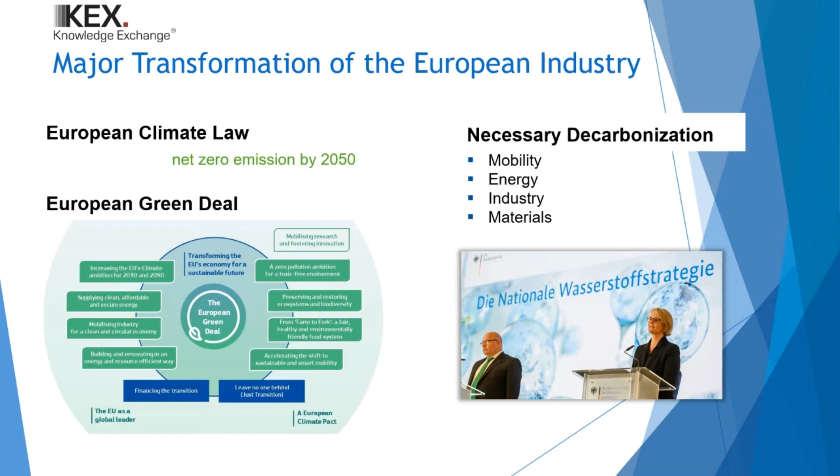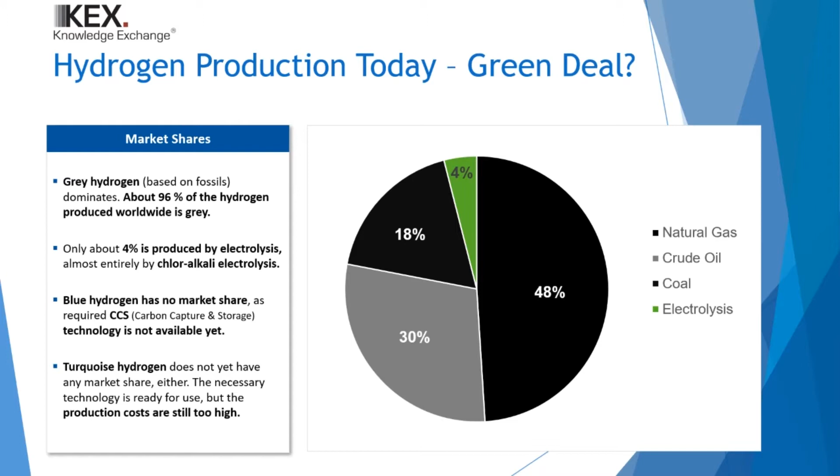And for sure, when we think about the next step for hydrogen, it has to be green. So we have to develop technologies to realize such a green hydrogen production, meaning without CO2. And we need to realize that this green or CO2-free hydrogen production also has to be competitive compared to the prices of gray hydrogen. And this is one of the major goals we have here in Europe. And this will also be one of the major advantages here in Europe compared to other countries like America and China. Because here we have really good technology know-how in Europe, where we can develop good production technologies, good material developments. So it's really important to start these green, CO2-free hydrogen developments now.

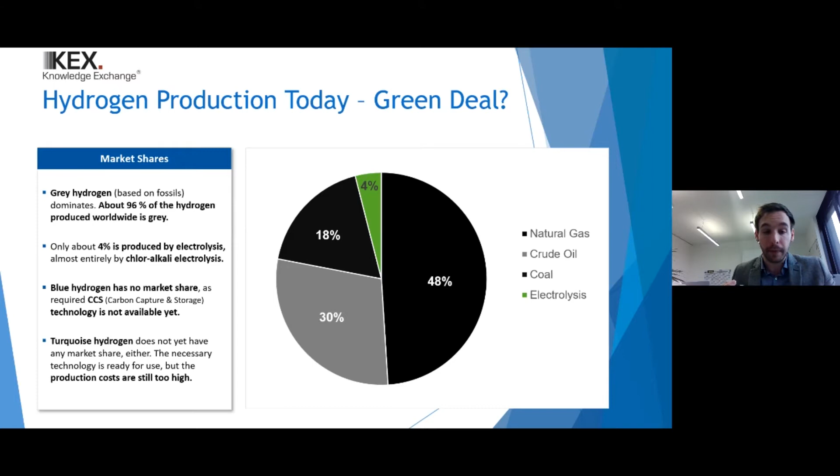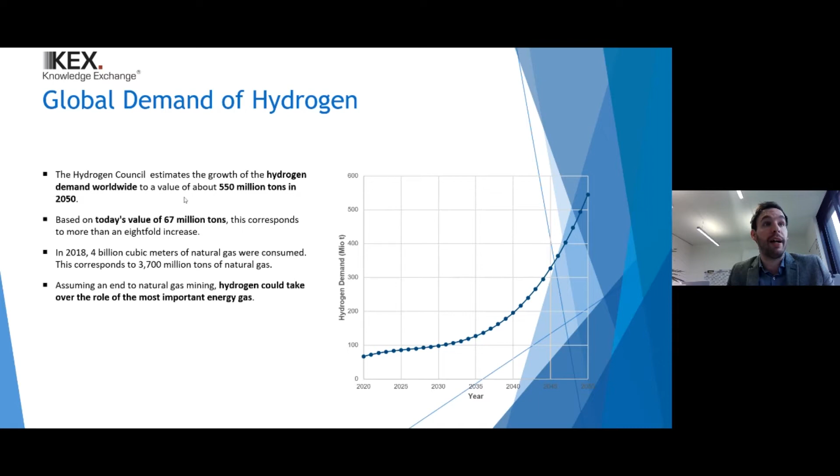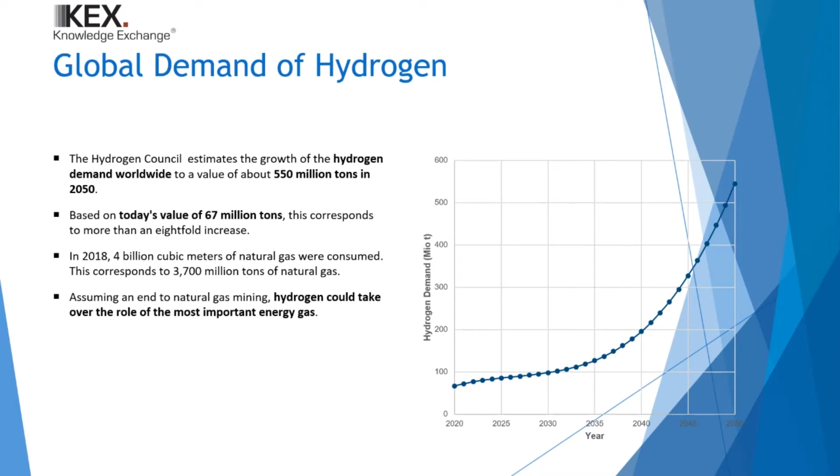And when we also take a look here, you see on the right a picture of the estimation of the Hydrogen Council. This estimates the growth of the hydrogen demand worldwide to approximately 550 million tons of hydrogen in 2050. And when you look at where we stand now, it's more than an eightfold increase. And here you also see that hydrogen is really needed for next product developments in the field of mobility. Mobility is one of the key drivers for hydrogen so far, but to be honest, we can buy such a hydrogen vehicle, but for example, a Toyota Mirai costs approximately 70,000–80,000 euro, so nobody will buy this. And here the goal is really to decrease the production prices. And yeah, this is more or less what we saw in the market of hydrogen.

And 3 years ago, we started our activities here in Aachen in the field of hydrogen. And we started with the question, how can I industrialize a fuel cell? So the utilization of hydrogen. And here we started with companies like Toyota, like Ford, like Daimler, together with automotive tier 1 suppliers, like Siemens, like Bosch, like Rheinmetall, to develop potential technologies to industrialize such a fuel cell. So the big goal is to decrease the prices. That means we develop new designs of fuel cells. We're also going directly into prototyping to really have clear data.

How can I decrease the cost of such a fuel cell product? But now, I would say such automotive OEMs say, okay, we are ready for market entry. But when we are honest now, for the hydrogen economy, let's say it's nice to have such a fuel cell system that is maybe good in price, but everything before this hydrogen utilization, meaning the hydrogen production and hydrogen infrastructure, is definitely also important. Maybe it's also much more important to realize which technologies can be realized and how can I decrease the price.

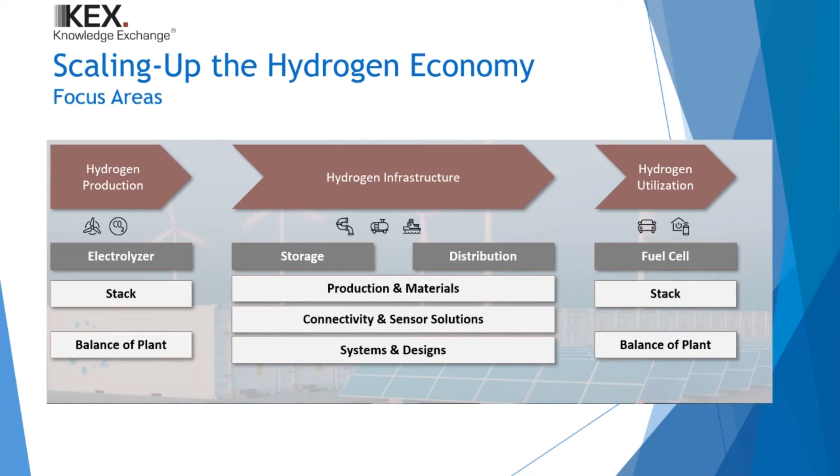And for sure, you can also imagine that will not work with only one company. Here we have to build up a really strong network with strong companies, with strong research institutes, to really say, okay, we build up now a product, a material for hydrogen, and say, okay, this is now the standard for us in the field of hydrogen production or hydrogen infrastructure.

And what does it mean really? So what are typical components in such a fuel cell system, in such an electrolyzer system? Typically, it's divided a little bit into the balance of plant, meaning the overall system, and the stack component, where the hydrogen and the oxygen are reacting with each other. And when we take a look at the balance of plant especially, we see there are a lot of components and a lot of know-how that have to be built up.

So in the balance of plant we talk about hydrogen tanks. We talk about air compressors. We talk about electric motors. We talk about batteries. We talk about hydrogen lines. But what we also talk about is, let's say, these smaller components called sensors, pressure valves, rectifiers. This is also a really important point. How can I build up a lot of sensors, a lot of valves for my hydrogen economy, and what are the standards and norms for these?

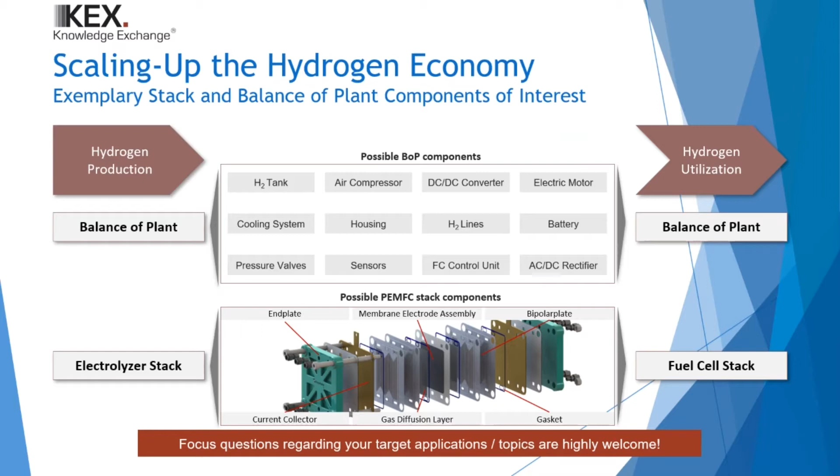And in the field of distribution, we talk about developing new material pipelines. We talk about the big problem of hydrogen embrittlement. You have to think about hydrogen, the smallest molecule. So there are a lot of problems or challenges in the field of materials. We talk about fittings and connections, and we also talk about retrofitting of existing infrastructure. So for sure, it's maybe a goal to use the existing infrastructure for the gas sector, for example, so that I can also use hydrogen in this infrastructure.

But the question here is, how can I do it? Can I do it without a problem? At the moment, they say up to 10% hydrogen can be introduced in the existing infrastructure. But what's happening when my hydrogen economy is scaling up? Then I need much more hydrogen. Is it maybe possible to do retrofitting in my existing infrastructure up to 20, 30, 40, 100% hydrogen? What do I have to do? These are really interesting questions, and these questions are at the moment not solved.

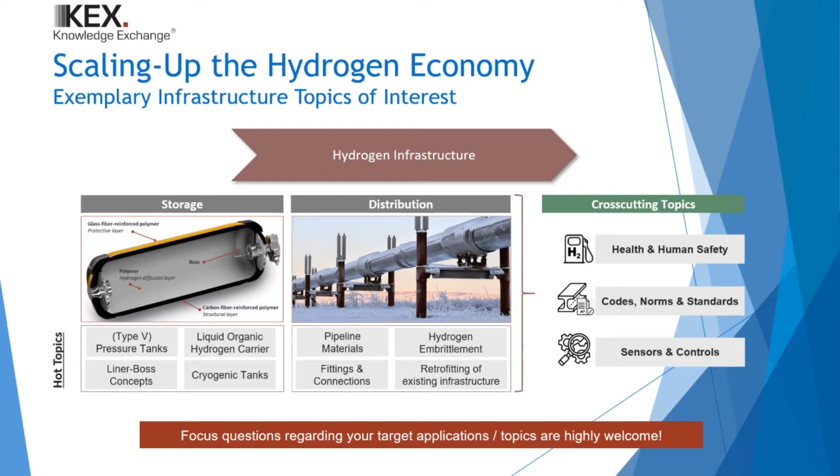And in general, the cross-cutting topics are really, really important. The most important thing, and a lot of people are afraid about this, is health and human safety. A lot of people say hydrogen is really dangerous, I'm not sure if it's working. And for sure, codes, norms, and standards, to establish new standards. And the sector of sensors and controls, what can be done in these fields, are cross-cutting topics as well for hydrogen production and utilization, and also for the hydrogen infrastructure.

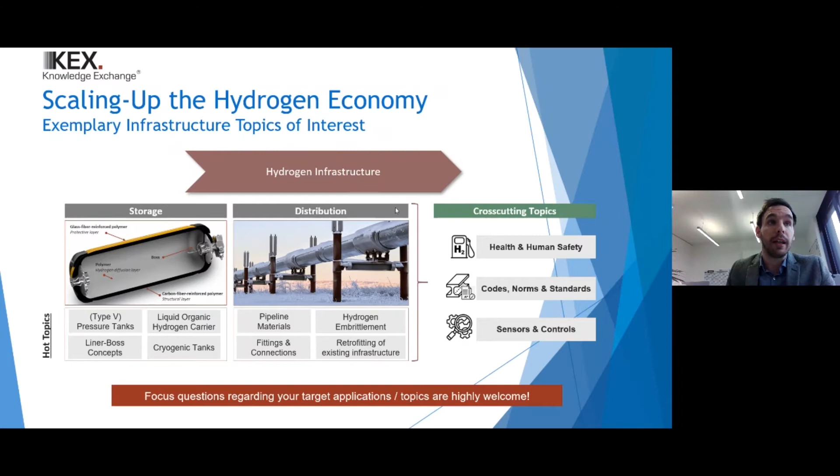I told you that hydrogen vehicles, or hydrogen products in general, are really expensive, and I would like to show you why this is the case. When we talk, for example, about battery vehicles, then you have your power electronic system. So you have a battery, you have a DC-DC converter, you have a DC-AC inverter, a motor.

But now in the field of hydrogen, I also need these power electronic systems, and on top I need a lot more systems. So for example, when I want to process my fuel, my hydrogen, I need a lot of components here. I need my tank, my pressure regulator, I need an injector, I need a hydrogen recirculation system in general, and for sure I need a lot of components, also valves, sensors, and so on.

Then beside this hydrogen processing, I also need air processing. So I need my oxygen. And also for this, I need a lot of things, an expander, for example, a humidifier, for example, and also a compressor. So this is a really expensive part. And on the other side, I also need thermal management systems, which are also important. Heat exchangers I need, which are really expensive. So you see, this overall system is really, really expensive.

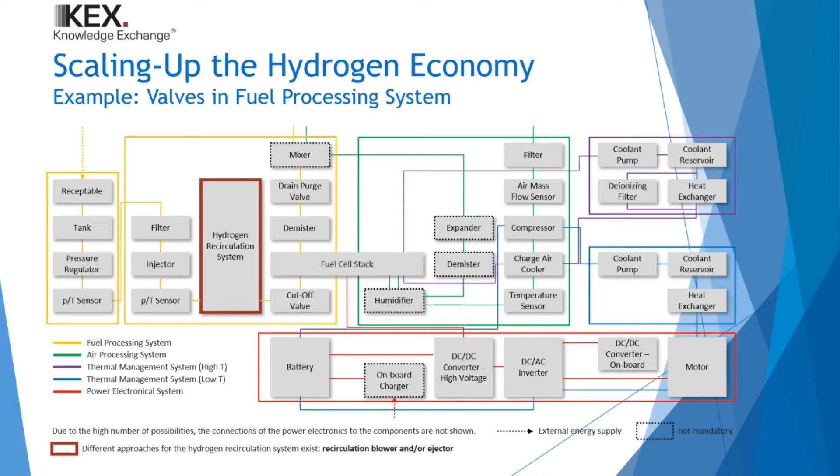But what you also see, not only the big parts are expensive, also the smaller parts are expensive, like sensors and like valves. And when we now take a look at the valves in such a system, then we see the following. Valves perform various tasks in such a fuel cell system. The injector, for example, is used for constant hydrogen recirculation and continuous, needs-based supply of hydrogen from the tank to my fuel cell system.

And the injector must precisely control the mass flow to meet the variable power demand, and other valves, such as the drain-off valve, for example, provide clean separation of condensate, while other switching valves are required for unscheduled, safety-relevant shut-off functions. And in general, all valves have in common that they must function precisely and reliably, and extremely low internal and external leakage values are essential to ensure stable system operation.

And this is one of the major parts. Only a small amount of leakage is acceptable, and the valves must meet the highest safety requirements through their entire service life. And it is really important that such valves are working in this system, because, as I said, this overall system is really, really expensive. And if this is broken, then I think everyone has a problem, because then the whole vehicle for 70,000 euros is broken. So then we really have a problem.

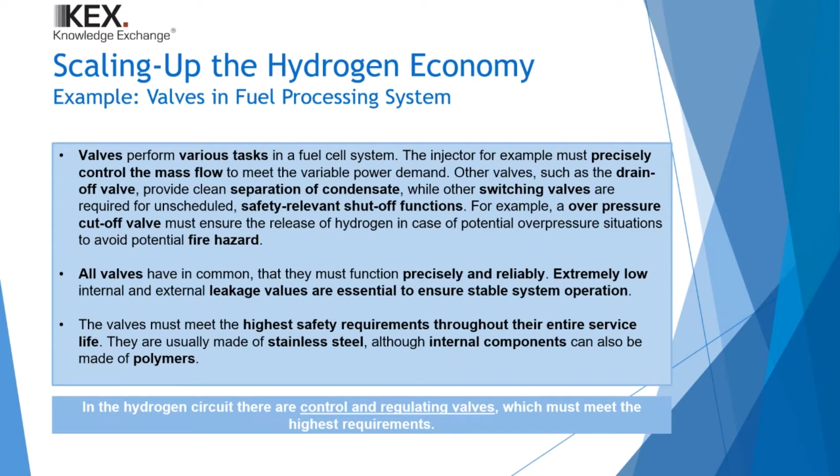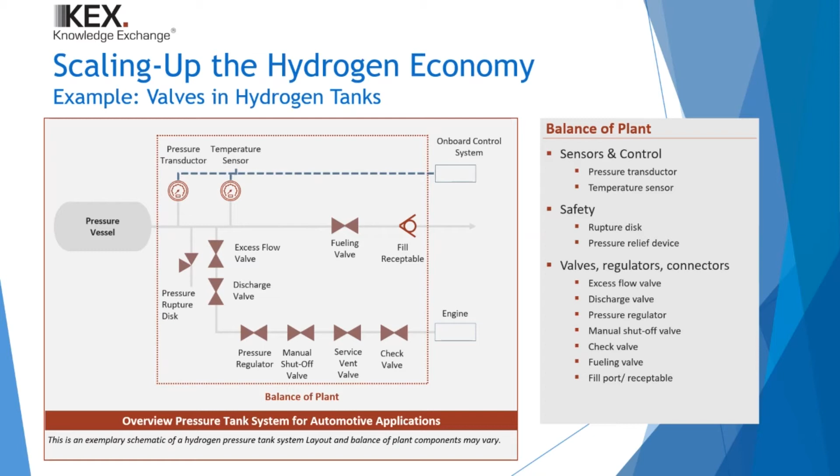These valves are usually made of stainless steel, and internal components can also be made of polymers, for example. But for sure, not only in such a fuel cell are valves important, also in the infrastructure part and in the storage parts there are a lot of valves. Here you have an example of a pressure tank system for the automotive application. And you see, for example, we have fueling valves, check valves, service valves, pressure regulators. And these are really important to have really high safety standards.

And for sure, also in the infrastructure part, there are these safety-relevant metal components. So the question often is, what are the advantages of forged metal components and what metal components can be forged? The big thing is that internal stress should be avoided in metal components. Fine-grained metal structures are recommended, and lower steel hardness is less susceptible to hydrogen embrittlement. And when we take a look at the overall system, you always see that valves play a really important part in the hydrogen infrastructure.

So, as I said, the powertrains for vehicles are important. Hydrogen plants, electrolyzers, liquefaction, chemical plants, compressors, pumps are really needed. Hydrogen pipeline and storage systems: here also valves, regulators, compressors, sealings are needed. The same in the hydrogen refueling stations, I need these parts. So you see there are a lot of components in such safety-relevant structures.

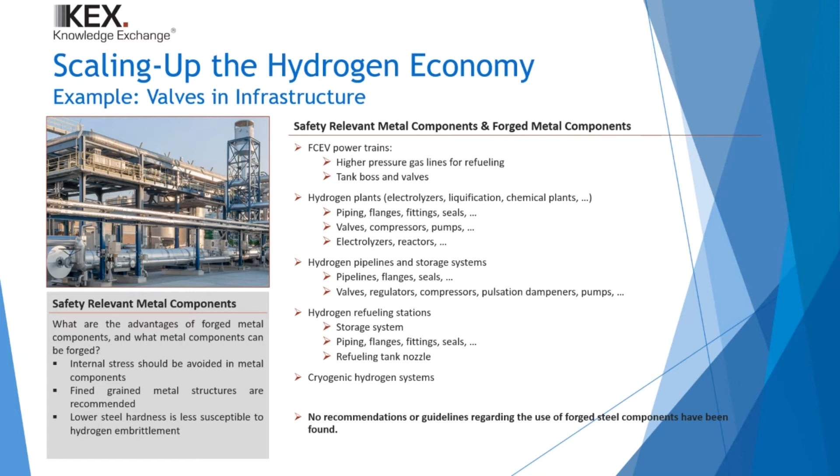And really interesting is that there are no recommendations or guidelines so far regarding the use of forged steel components, at least that we have found so far. So this is the really big challenge for the companies now, to define clear guidelines, clear standards and norms that can be used for the future hydrogen economy.

And as I said, this is a really important point to define such standards. And I also said that these standards can't be defined by one company. It really needs a good community. It needs really good connections with other companies. It really needs,

let's say, a consortium. And as I said, VALVEcampus, for example, is a really good community, I think, to give some advice, to make some recommendations on what standards and norms are important or needed for such a hydrogen economy for valves. I think such a community is really, really important for taking the first steps.

And we also saw this in the last years. We saw this also when we spun off out of the Fraunhofer IPT. So we said a consortium is the key for innovation. And in the last 5 years, we have done 20 different consortium projects about different topics. There are topics about additive manufacturing, artificial intelligence, but also the fields of hydrogen economy, industrialization of the hydrogen economy.

And the approach we have, we try to have companies in such a consortium project, and such a consortium project enables you to tackle potential disruptive changes of your business by providing, for example, overview and structure of a complex and dynamic technology field with technology and economical deep dives, access to a network of cutting-edge research entities and experts, a connection to solution providers and thought leaders, and for sure what we also try to realize, the utilization of synergies between partners for fast and cheaper implementation.

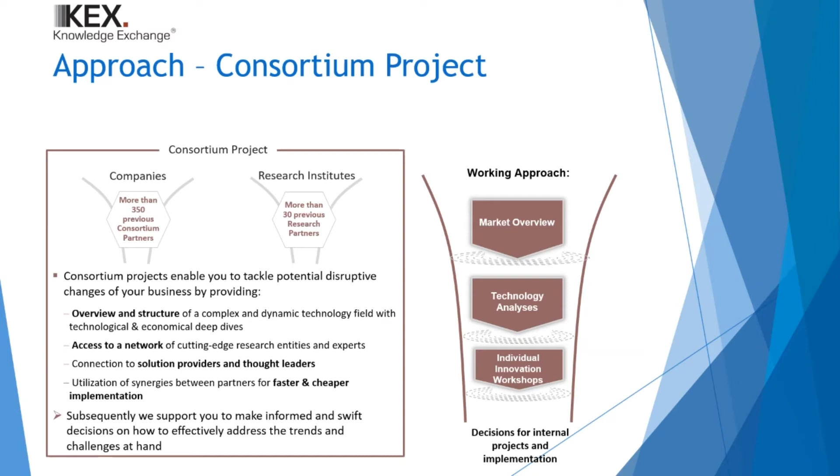And for this approach, we also now try to build up such a consortium in the field of the hydrogen economy. And how does it look like? It's now an explanation of how such a consortium project is working. You have to think about the methodology behind it. It's more or less a funnel. So we start very broad, and then do a deep dive analysis for your specific questions.

So we take a look at the market, for example, in the field of hydrogen, where we give you a global overview about relevant products, pilot activities, concepts in the field of hydrogen production, utilization and infrastructure, and derive the major technical KPIs. For sure, we also take a look at the market forecast, because when we take a look at the different countries, we see completely different forecasts for these countries.

For example, in China, we see the focus really is there in the transport sector. China, for example, has the goal to have about 2 million hydrogen vehicles by the year 2030, and this is a clear statement, and that's the focus so far. In the USA, for example, hopefully starting next month, there's also a lot now in the discussion of green energy, also green production, and there's a potential step that America is going in now.

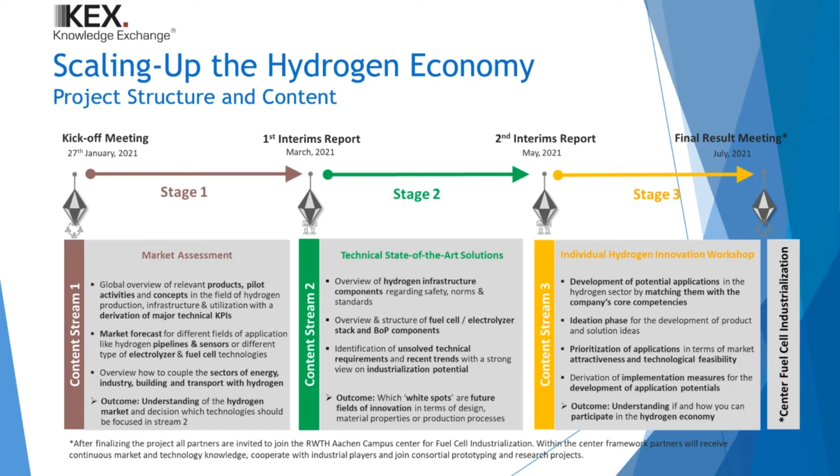We have a really big community at the RWTH campus, with more than 200 institutes, not only in the field of hydrogen, but along the whole value chain, more or less. We have a good network to other communities, Forschungszentrum Jülich, connections to Belgium and the Netherlands, and hopefully also with you in the next months. We also have good connections to politics in general. We have a strong cooperation with the National Organization for Hydrogen in Germany, and we know where the fundings are.

So we built up this network in the last years. We have a lot of partners on the industrial side, but also a lot of partners on the research side. And this is our work, or our statement: we try to be the connection between you, the industry partners, and the research partners. One general comment on the project: besides the technical information, the real benefit is the networking with future potential collaborations.